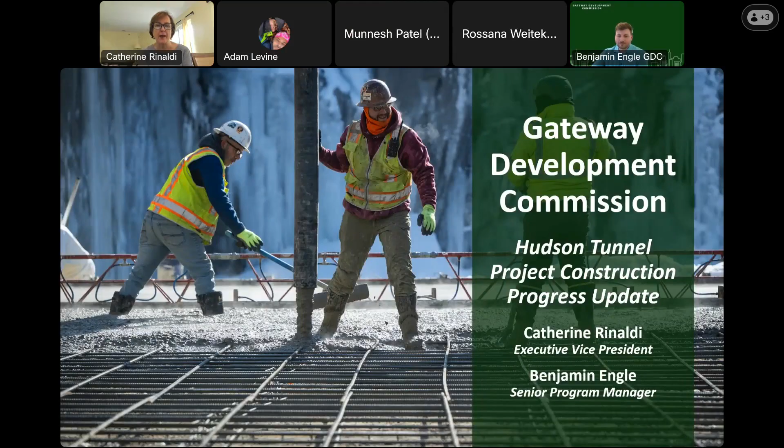Thank you so much, Adam. It's really great to be here to talk about this project to this group. It's a project that's been in the news a lot recently, and we're going to talk a little bit about that, as well as why the project is so important to the region.

Ben and I are going to tag team you a little bit. I'm going to do the first few slides that talk about the background of the project and some of the economic benefits of the project, and then I'm going to turn the mic over to Ben, who's going to walk through the various construction packages and give an overview of those packages and some of the progress of construction over the past couple of years.

So this slide really just outlines why the Hudson Tunnel Project is important. We like to call it the most urgent transportation project in the country. There are, as Adam said, 2 components to this project: the construction of 2 tubes, 9 miles of passenger rail track between New York and New Jersey.

There are 3 separate boring packages, one in New Jersey, one in New York, and one to be awarded very soon, with respect to creating a tunnel under the river. Once the new tubes are constructed, the project will then pivot to the rehabilitation of the existing North River Tunnel, 116 years old, which creates reliability issues experienced up and down the Northeast Corridor.

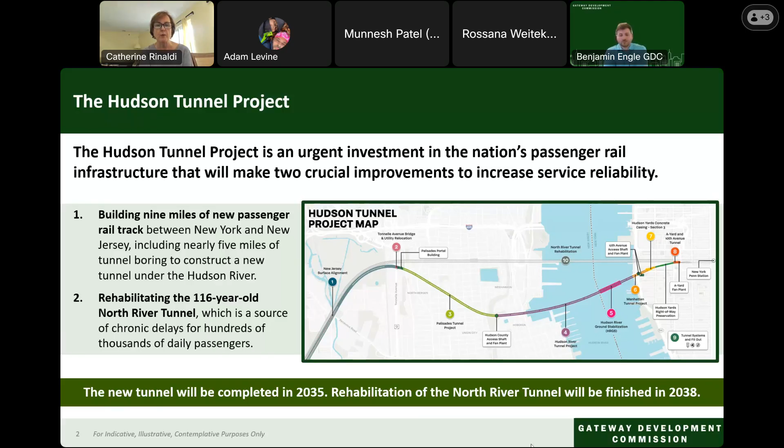So there are 2 timeframes at the bottom of this slide. The new tunnel is expected to be completed in 2035, and then when we pivot to rehabilitation of the North River Tunnel, that will be done in 2038.

So the urgency of this project, right? I think this is something that's been well known, and NYMTC has been very helpful telling the story of why this project is so important. It is the centerpiece of the Northeast Corridor, which generates 20% of America's GDP. There's 800,000 passenger trips on the Northeast Corridor, 2,000 trains a day. The unreliability of the North River Tunnel holds the region back and the transportation network back. The tunnel drives property values, drives the economy of the region. Any sort of a setback in those tunnels would have really significant detrimental impacts to the local and national economy.

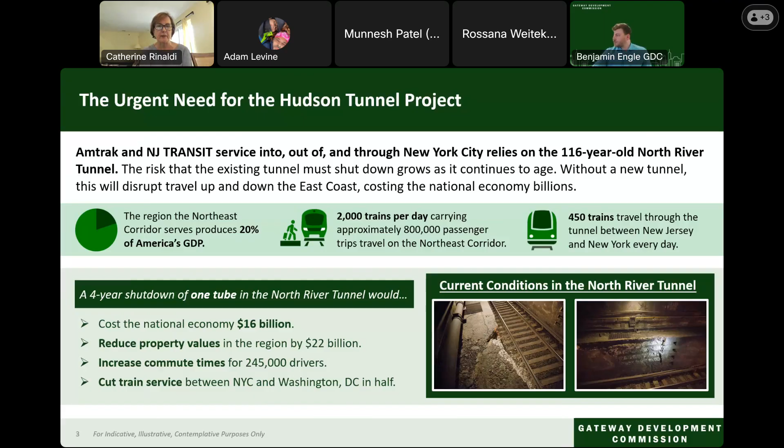There are crucial union jobs that are going to be created. $4.5 billion in economic output from the active construction projects, more than 20,000 jobs, and $1.7 billion in labor income generated by the 10 separate packages. Ben will go into some of the details with respect to the different packages. A lot of this spending, 94%, is actually occurring within the United States.

So there's economic activity that's going to be generated throughout the country, and the advocates we've been able to gather to support the project recognize how important it is, not just to the transportation network, but to the local and regional economy.

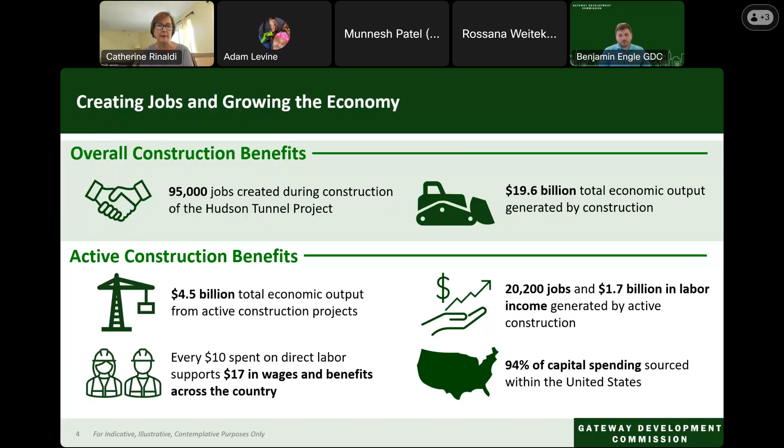We have been working back and forth with our funding partners. We have a very collaborative, strong working relationship with our funding partners to be able to answer whatever questions they had about the existing DBE program, both compliance with earlier versions of that program, as well as changes made under the current administration. That dialogue and that sharing of information continues.

Earlier this year, we came to a point where we were no longer able to meet project expenses by looking to our letter of credit, which we had secured as a condition of our federal funding arrangements. That was a point at which we needed to pause the project, and we filed a lawsuit in the Court of Federal Claims against the U.S. government for breach of contract.

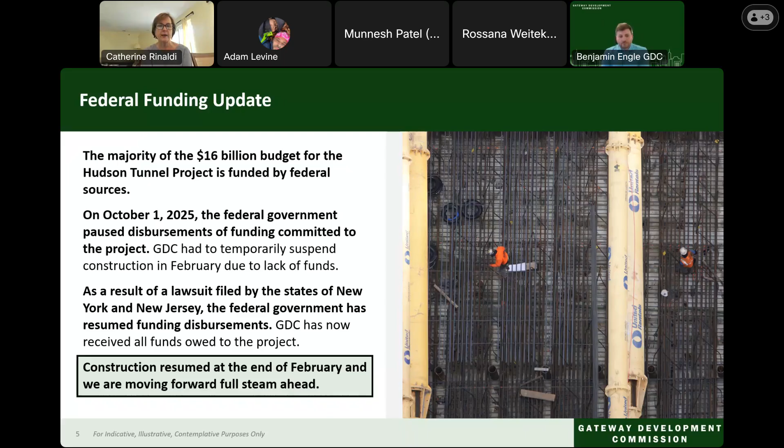That litigation is continuing, and as a result of that litigation, as well as parallel litigation brought by the states of New York and New Jersey in the Southern District of New York and the Federal District Court, we have been able to get reimbursements flowing again. We are now caught up - all of the reimbursements that were being withheld have now been paid to GDC. As a result, we were able to resume the construction that we briefly paused in February. We are now full steam ahead, moving ahead with projects across the various construction packages that Ben will run you through in a little bit.

One of them is actually done, the contract we call the Tunnel Avenue work. That's the relocation of a road bridge to allow the first tunnel boring machine to begin boring the Palisades Tunnel. That work was substantially complete as of October of last year, so we can knock one of the 10 off the list.

The next major project that's going to proceed, and Ben will give you more information about that, is the Palisades Tunnel. We've got two tunnel boring machines in New Jersey being assembled, and that boring is expected to begin later this year.

The Manhattan Tunnel Project, which is essentially doing the work to allow the tunnel boring machine to pop out from the river up into Manhattan. That contract was awarded early in 2025. That work continues, and there are some challenges there that Ben will talk you through.

There's a separate contract package being advanced by Amtrak that was not affected by the funding pause, which we call HYCC3. That's constructing the concrete casing that will allow the tunnel to go into Penn Station.

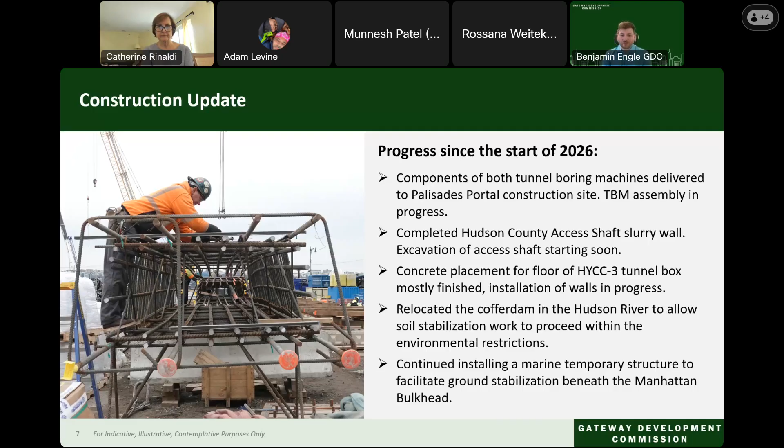The first project, our Package 4, was the construction of a new roadway bridge. Route 1 and 9 was at grade on an embankment. This was a key early work project that was completed on time, on budget, and allows access for the tunnel boring machines to start doing their work.

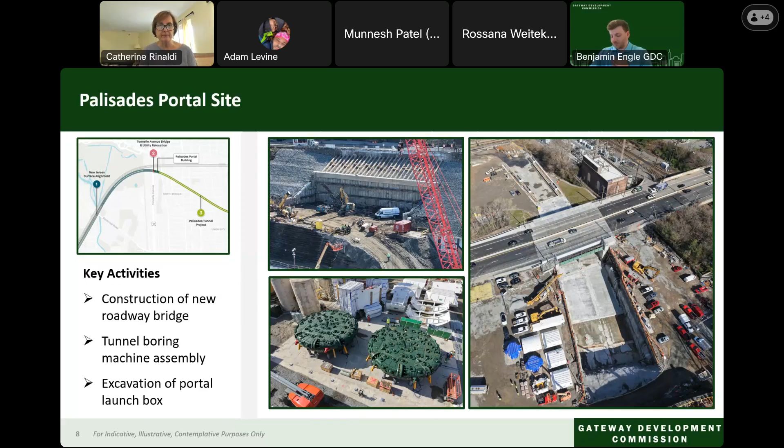And Ben may be back. I don't know if he's back, able to talk. Yeah, it looks like he might be frozen. Okay, so I think I described a little while ago the extent to which we've got 3 separate tunneling projects. So describing the project west to east. Are you back then? Now we can hear you, okay? Sorry about that, I don't know where I cut out.

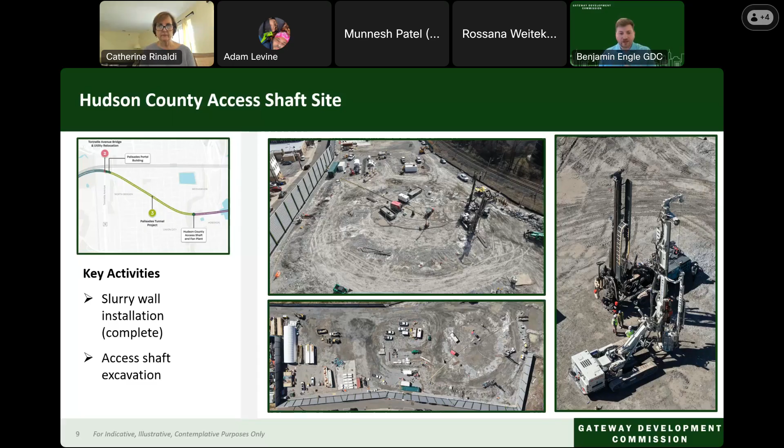So I think we've moved from Tonnelle Avenue over to the Hudson County Access Shaft. This is a key interface for 2 contract packages. The Palisades Tunnel Project is building the access shaft. The slurry wall, the wall that forms the shaft, is complete. They'll start excavating that, and that's where the tunnel boring machines for the Palisades Tunnel will be removed from, and the location for the tunnel boring machines for the Package 1C Hudson River Tunnel Project will be assembled and make its way east. Ultimately, the site will be the location of a permanent fan plant facility that will provide emergency egress and other life safety provisions.

Okay, hopefully you can still hear me, I see the slide moved. So we make our way to the Hudson River, and you can see our cofferdam. The new tunnel has to meet existing Penn Station, and for those of you who've been to Penn Station, to get to the track level is not very deep. So we have a maximum 2% grade, very slow, very heavy trains, and that means we're very shallow in a portion of the river. We call that our low cover area - it's a 1,200-foot area by 100 feet wide where we are conducting deep soil mixing, injecting concrete into the soil to form a hardened rectangular block. This is intended to be completed before the Hudson River Tunnel TBMs make their way to this area, giving a reliable path for those tunnel boring machines. We like to call it chocolate pudding, the Hudson River chocolate pudding.

It's very soft, it's very dark, but I wouldn't suggest eating it. We're going to harden that chocolate pudding almost into a brownie, and stabilize the riverbed before the tunnel boring machine gets there. To do that, we are allowed by permit to have 600 feet of cofferdam in the river at a given time.

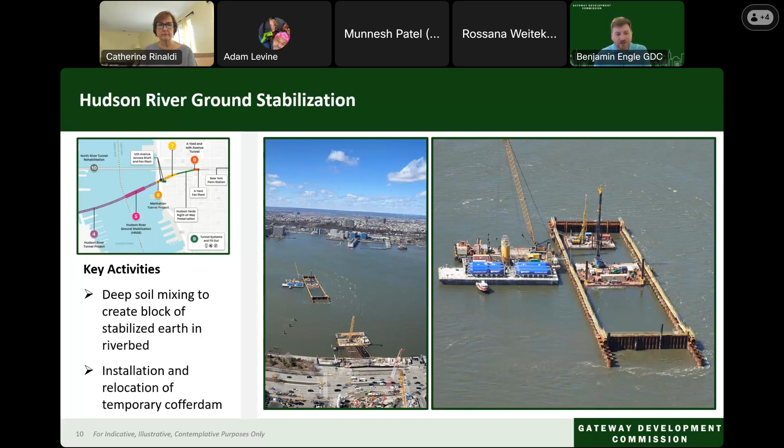We make our way to Manhattan, and if you're ever on the west side of Manhattan, either on the High Line at 30th Street as it bends around the West Side Yard, the Long Island Railroad West Side Yards, or in Hudson River Park, you can see our construction. The Manhattan Tunnel Project is a really important project.

We're currently installing the slurry wall, so the concrete wall for the shaft, and then it'll be excavated. Once it's excavated, a modified type of tunnel boring machine called a tunnel shield will be placed in the shaft and start excavating towards the river.

This portion of Manhattan was originally the Hudson River. It's all landfill, historic fill - really not great conditions for tunnel mining. So what we have to do is prepare the ground, just like in the middle of the Hudson River, preparing the ground between the shaft and the river for hardening.

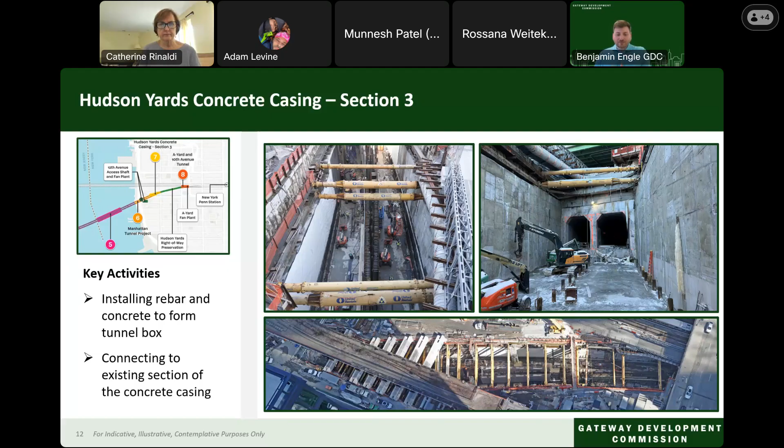Because I'm a planner and we're in front of a planning group, I thought it'd be an interesting thing to talk a little bit about our environmental work to date. The project received a final environmental impact statement and record of decision in May 2021, so about five years ago.

As the project has advanced through design development and general project development, we're always looking for ways to mitigate our risks, improve the way the construction will advance, and we're also learning from industry. So we do NEPA reevaluations when there are changes to the project, means and methods, and scope. Our purpose through these reevaluations, working with the Federal Transit Administration and Federal Railroad Administration, is to determine whether an environmental decision—in our case, record of decision—remains valid for agency decision making.

So we've seen we have a number of them. You can see we're up to number 14, but just some examples. You can see them on HudsonTunnelProject.com.

The contractor for Palisades Tunnel suggested that it'd be more efficient to work on weekends instead of stopping work and then picking it back up, especially for assembling the tunnel boring machine. So we did analysis to make sure we weren't creating any new impacts by having tunnel boring machine assembly run 24 hours. Another example is our work in the river.

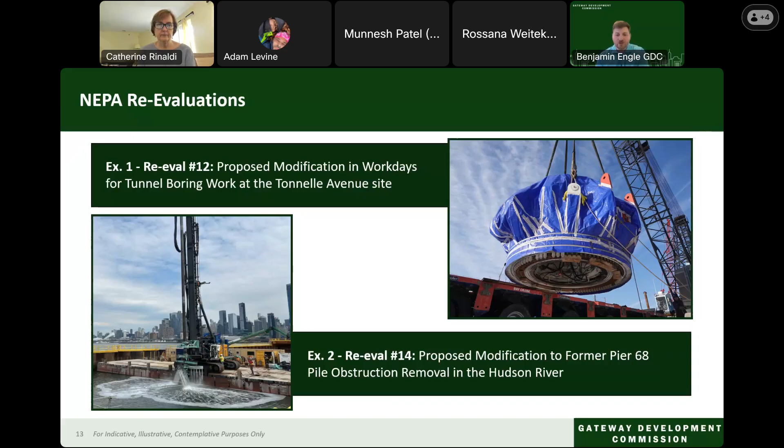Our website, gatewayprogram.org, has a really great set of project websites. You can learn about each of the contract packages that Kathy and I talked about today, with a lot of pictures. Molly Beckhart, who's on our team, is constantly updating the website with all the latest pictures. You can see our EarthCam webcams there as well. Follow us on the social media handles on the screen here.

And like I mentioned, our community engagement centers are really, really cool places. The New York one is located at 249 9th Avenue, open Monday, Wednesday, and Thursday. You can find that on the Community Engagement tab on our website. And the New Jersey Community Engagement Center, which is opening very soon, is on 18th Street in Weehawken. We'll have the model of our tunnel boring machine that you see in the picture there, before it was disassembled, put on the ship, and then brought here. So you can take a look at that model, which is really cool, and take a picture, and a mock-up of the tunnel as well.

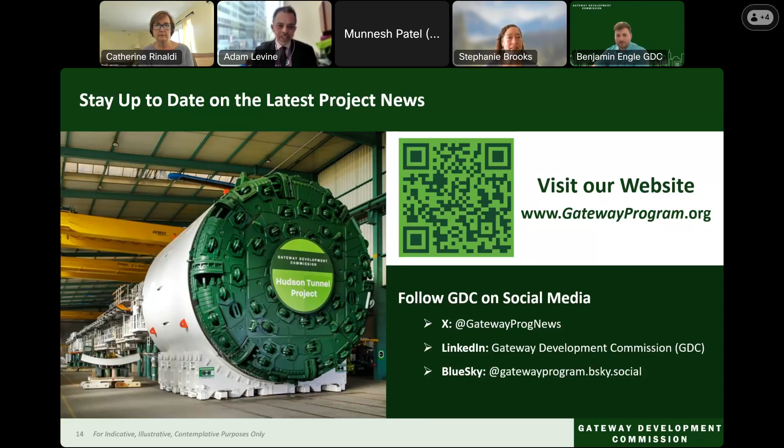Yep, I would expect. All right, good to hear. Thank you. I'll hold any other questions I've got because I do see the chat box popping up. Stephanie? Yes, we do have some great questions. The first one: who manages the construction contract and who owns the finished investments?

Is it Port Authority? Is the commission under Port Authority, or is it a whole new entity? So I can take some of that, and then Ben and I can tag team you on this. So GDC has a unique and very complicated governance structure, right?

So we're a special purpose entity created by statute in New York and New Jersey. Once the Hudson Tunnel Project is over, we go out of existence. Unless somebody adds scope to us along the lines, we will go out of existence when this project is done. We have board members from New York, New Jersey, and Amtrak.

And then we also have partnership with what we call our SEPs, the supporting or executing partners. So depending upon what package you're talking about, it could be led by the Port Authority, it could be led by Amtrak, or New Jersey Transit. It really depends upon the package.

But when this whole project is over, these will become Amtrak assets. So we will be turning all of this over to Amtrak, and then Amtrak will have the ongoing obligations with respect to maintenance and operation, obviously, going forward once GDC goes out of existence. Ben, did I miss anything?

No. Our governance structure is outlined through our project development agreement, which is a really important tool for us. It's on our website, so the public can see it, and it outlines really everything that Kathy talked about. GDC being a relatively new agency, we are partnering with our sister agencies, Port Authority, Amtrak, New Jersey Transit, legacy agencies, and deploying them where they have the best expertise.

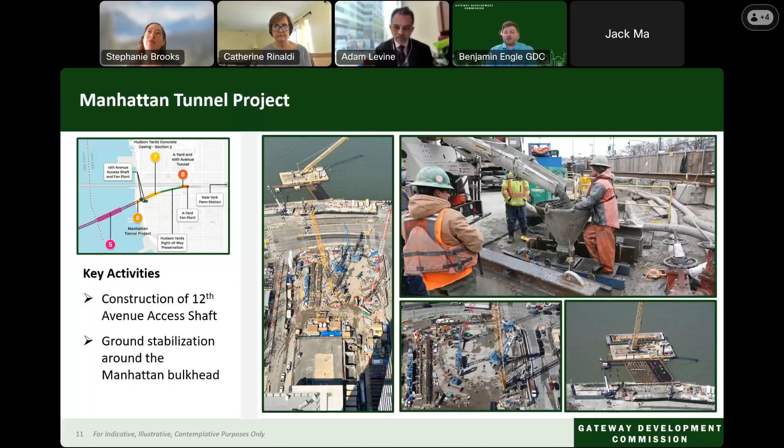Next question is, how will this tunnel change the rider experience, and when will improvements be perceptible to riders? Right now, crossing the North River Tunnel, which was opened to trains in 1910 with the original Penn Station, is one track in each direction. If you think about that from a highway perspective, the New Jersey Turnpike, Route I-95, could you imagine having one lane in each direction?

And the commuter experience today, whenever there's a signal issue or a disabled train, we hear about it all the time, and it really impacts the commuters, people trying to get to work, people trying to get home for dinner, people trying to get to their kid's soccer game, whatever it may be.

Once we complete the new tunnel in 2035, there'll be 2 new tubes, and we'll start the rehab of the existing North River Tunnel, which has served this region more than it was ever intended to. The Pennsylvania Railroad, which built the North River Tunnel, never expected the commuter traffic we have today. It was really built for long distance trains, and they anticipated building more tubes under the Hudson, but they never did, and ultimately they went bankrupt.